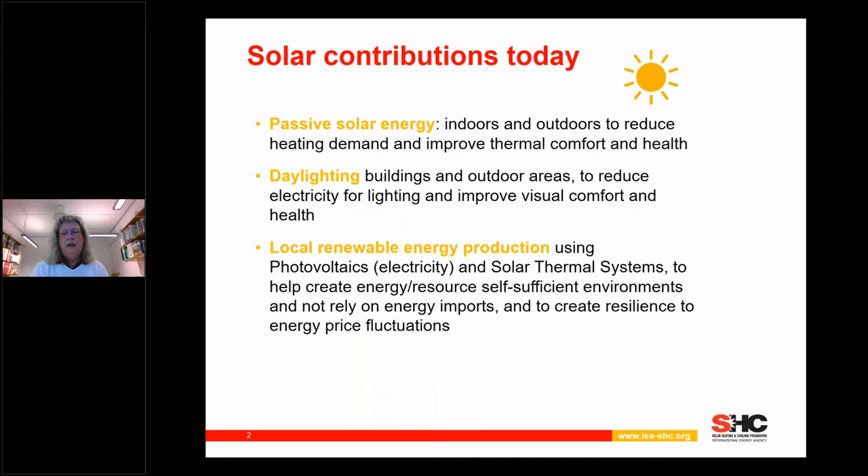And we can use it for local renewable energy production using PV and solar thermal systems. And in this way, we can create energy or resource self-sufficient environments. So we don't need to rely on energy imports. And in this way, we can create resilience to energy price fluctuations. And we can use it for local food production and green areas to improve air quality and reducing stormwater. So we can really use it for a lot of things. But I think that we need to use it more efficiently and more wisely in the future. I think we can improve this a lot.

So the opportunities for solar neighborhoods is that it is a means to achieve net zero energy districts and low carbon cities. And if we address both solar energy production and passive strategies when we plan neighborhoods, this enables us to identify synergies and to avoid conflicts between competing uses. So we shouldn't waste the possibilities to use available surfaces in neighborhoods. And we need to create long-term solar access.

This is very important. So if, for instance, you have a house where you put solar panels on the roof, you don't want your neighbor to erect a building on the other side of the street just 1 year after, destroying your solar gains and your investment. So you really need to have this secure solar access for a long time. And this is something we need to be better on when planning cities.

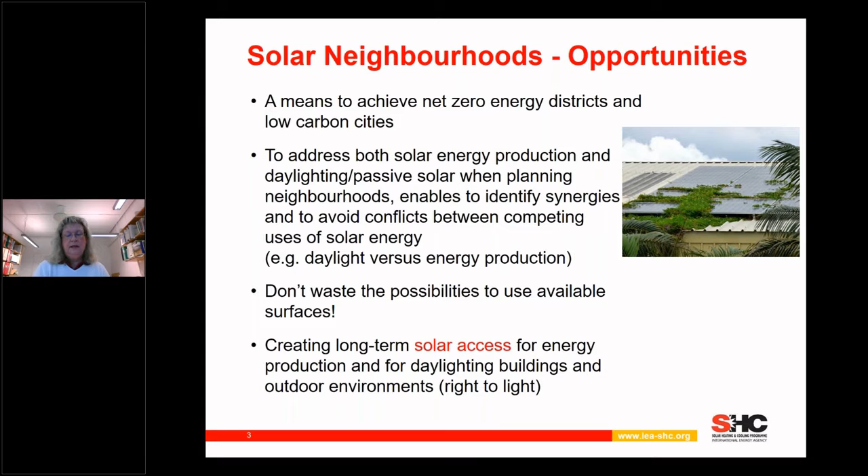Going to the project specifically, we started in 2019, and the project ends in 2023, the end of the year. So we are midways now, and the objective is to support key players to achieve solar neighborhoods that really facilitate this long-term solar access with good planning. And we work with and on new neighborhood development and to improve existing neighborhoods as well. And we deal with both active solar strategies and passive solar strategies.

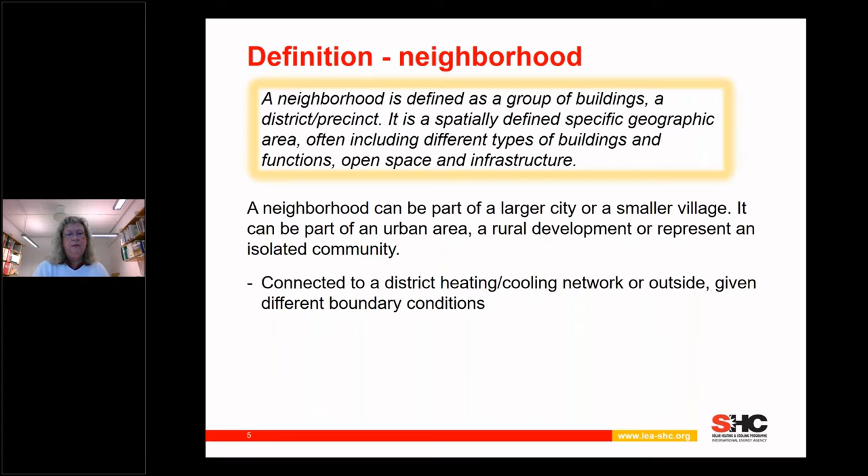And we define a neighborhood as a group of buildings within a specific geographic area, often including different types of buildings and functions, open space and infrastructure. And the neighborhood can be part of a large city or an isolated community or something in between. And of course it can be connected to a district heating or cooling network or outside such. And this gives different boundary conditions that we have to take into account when planning.

We organize ourselves in different subtasks with different leaderships. And we have 4 subtasks. A, on solar planning strategies and concepts with a Canadian leadership. B, on economic strategies and stakeholder engagement with the Italian leadership. Subtask C, on solar planning tools with a joint leadership between Sweden and France. And Subtask D, on case studies, which is jointly led by all the leaders, and we also have a coordinator helping us from Norway. And the case studies are really strongly connected to the other subtasks and topics where we work together and collaborate with municipalities and the key stakeholders.

And I am the general project leader. And the names here in red are the ones that you will meet today in the webinar. And the participating countries in our project are mainly some European countries, but also Australia, Canada, and China. So in total, we are 9 countries working on this.

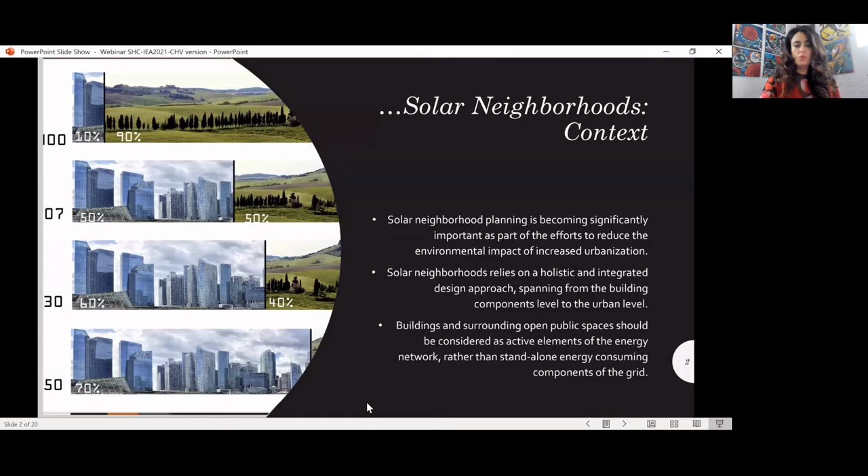Starting with a little bit of context, solar neighborhood planning is becoming significantly important as part of the efforts to reduce the environmental impact of increased urbanization, where by 2050 we are expecting 70% or more of the world population to be residing in urban areas. Solar neighborhood relies on a holistic and integrated design approach that spans from the building components and the building level to the urban level. Within this holistic approach, buildings and surrounding areas, including public spaces, landscape, streets, and street furniture, should be considered as active elements of the energy network rather than standalone energy-consuming components of the grid.

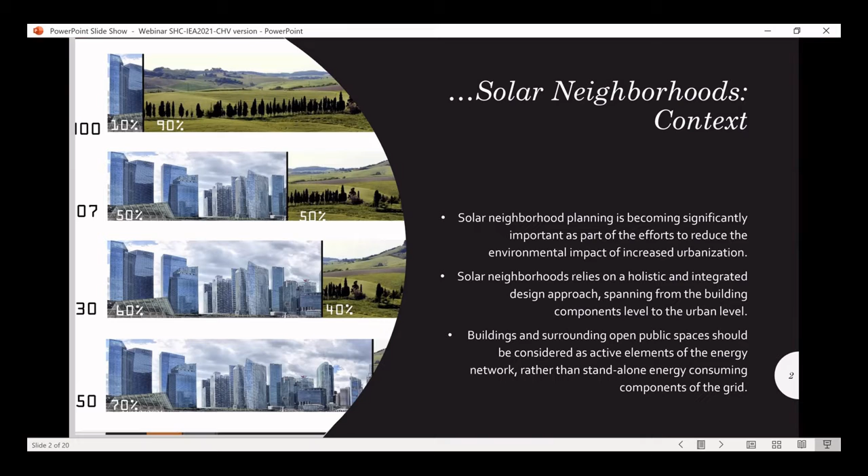So at the building level, solar building design relies on passive designs in buildings. In fact, passive design is often attached to solar building designs. Improving solar access together with various design principles such as thermal mass, high insulation, and airtight envelope are some of the basic principles of passive solar buildings. These principles can be implemented in all types of buildings, including residential buildings, offices, institutional buildings, and others.

Daylighting, passive heating of perimeter zones, passive and hybrid ventilation, coupling ventilation with solar chimneys, as we can see in some of these sketches, can significantly affect energy demand, reducing the energy consumption of buildings and their dependence on the local grid, which also can increase the resilience of buildings to climate shocks and climate risks.

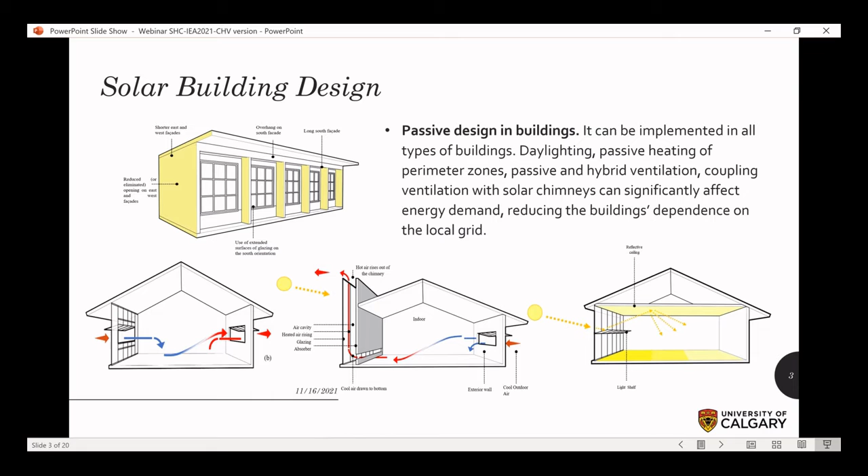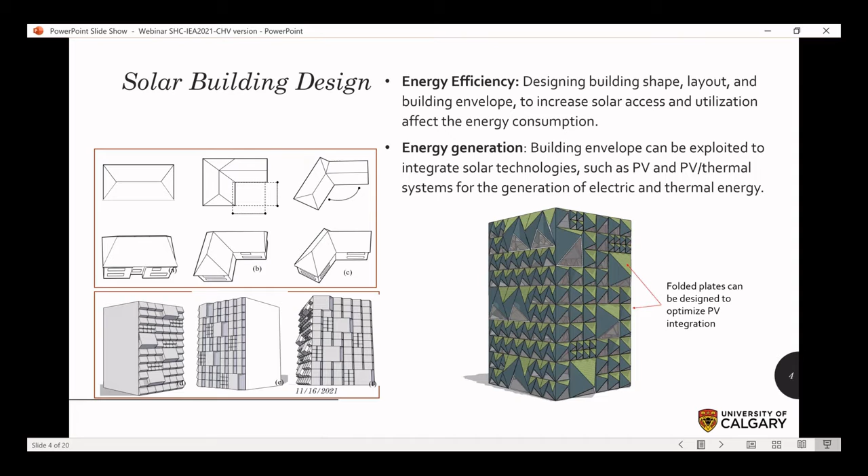Solar building design allows us to improve energy efficiency of buildings; designing building shape, layout, and building envelope to maximize solar access and utilization within the building affects the energy consumption of these buildings. It also allows better designed solar energy generation, since a well-designed building envelope can be exploited to integrate solar technologies such as photovoltaic systems, thermal collectors or hybrid photovoltaic thermal systems for the generation of electric and thermal energy.

Talking a little bit about building envelope design and the integration of technology. In fact, building envelope can be optimized to maximize the surface area and the exposure to solar radiation while preserving architectural and aesthetic flexibility. These are some examples of a theoretical study that was done by myself and my group at the Solar Lab at the University of Calgary, where we try to optimize the building envelope shape geometry through a different design of folded plates that allows maximizing solar radiation on these plates. And we were also integrating different types of photovoltaic systems in different colors.

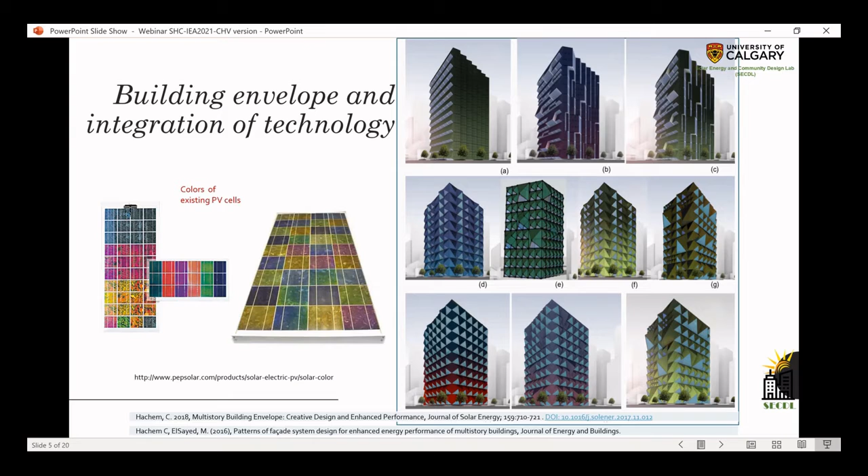At the level of neighborhood, many aspects affect an optimal solar planning. For example, the type of neighborhood and the building mix present can affect the building designs and as such available surfaces for solar technologies. Also, the ratio of commercial to residential buildings, for example, within a specific neighborhood type is important, especially when the goal is to achieve a net zero energy status.

An optimal ratio of commercial land area to overall built land area can be between 23% and 32%. This is according to a theoretical study that we conducted, where according to this ratio, we were able to integrate enough photovoltaic panels to allow achieving net zero energy within a mixed neighborhood.

Density is another important and critical factor in the design of solar communities. Studies associate, in fact, increased built density with sustainable development, but this should consider cumulative effects of various additional factors of a compact development. For example, the land use, the transit accessibility, job availability within walkable distance, walkability, and others.

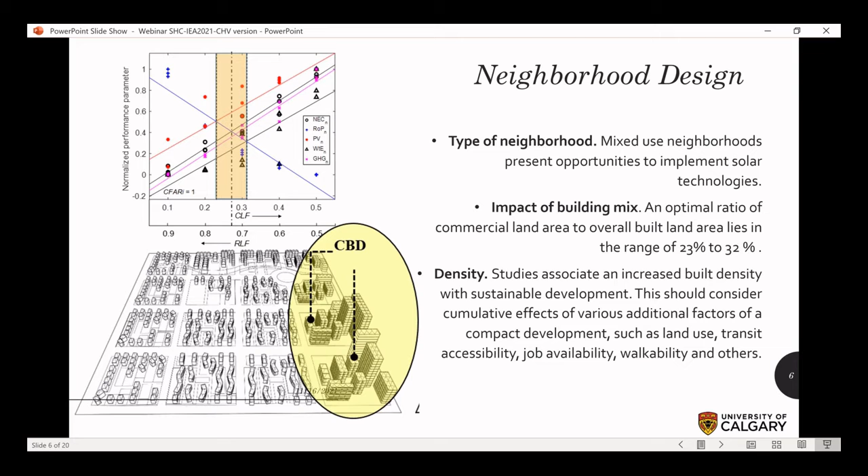There are other important elements in the design of a neighborhood that also impact their solar access and solar potential and their design as solar neighborhoods. This includes green and spatial areas. Landscape can offer, in fact, solutions for the integration of photovoltaic panels as well as solar thermal collectors and allows really to generate more energy that can be utilized in these neighborhoods.

Orientation of streets can affect the potential to capture and utilize passive solar energy as well as energy output of various solar technologies. And as such, they really should be considered from early design stage, and the buildings around them should be designed to get the best performance with the best orientation.

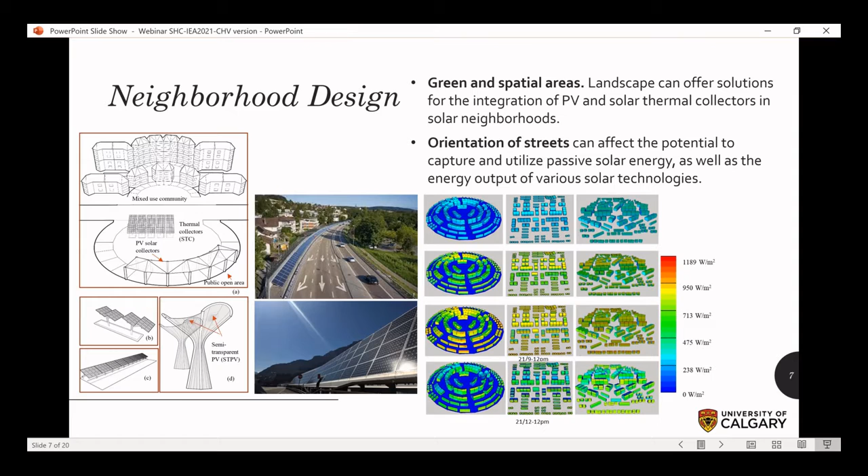Now, talking a little bit more in detail about the work that is currently ongoing in Subtask A, we developed specific designs of archetypes to study solar strategies. Archetypes in this task are considered as representative neighborhoods of existing or new patterns in different countries. This includes repetitive patterns of commonly applied design, such as streets, building types, shapes, density, etc.

And here is an example of commonly seen neighborhoods in North America, residential neighborhoods where we see a grid layout together with attached and detached houses. Other examples of archetypes can be representing uncommon or innovative examples. We have a few of these that were also presented and proposed by the experts in Subtask A, such as, for example, Sinfonia in Bolzano, the campus in Norway, and so on.

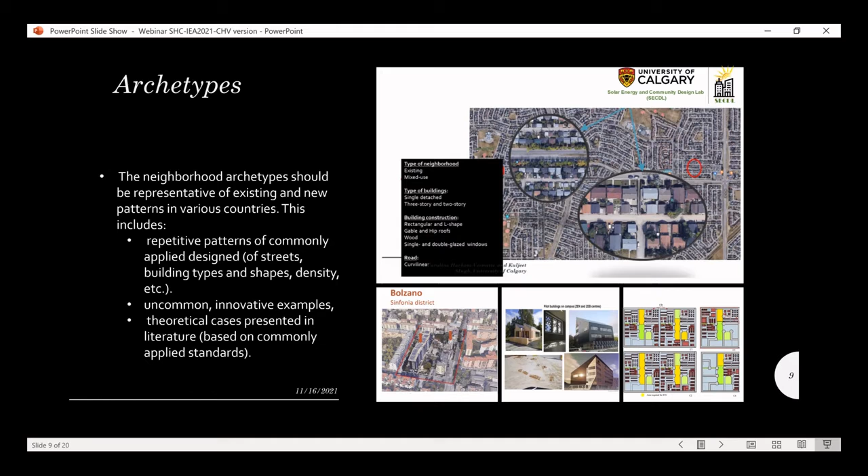Other archetypes can be theoretical cases presented in literature or especially developed to study different strategies. And here are also some examples of theoretical neighborhoods, and I will be talking a little bit about these and some examples of the results that we obtained in a couple of slides.

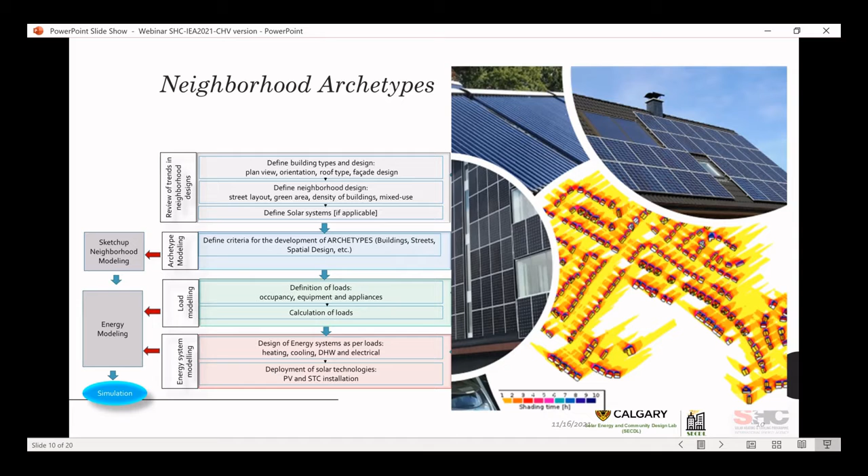A methodology is also developed to collect information about these archetypes, including building types, materials that are employed in buildings and building envelope, outdoor areas, and also materials employed in these outdoor areas, streets, etc. This information is collected in what we call a matrix. And this is an Excel form that can facilitate their input into various simulation tools, allowing us urban level simulations. Once the base neighborhood of each archetype is established, various solar strategies can then be analyzed.

Here now I'm presenting some of the theoretical examples that I just mentioned of neighborhoods, what we call the neighborhood units, and these are small neighborhoods designed according to various sustainable measures and range from residential dominated neighborhoods to higher density neighborhoods with commercial centers that include different types of trades and different types of buildings. The study aimed here at analyzing various renewable energy and the role of solar energy for thermal and electrical production.

I want to highlight also that the PV were accommodated in roofs and some portion of the facades when available, that means when we have higher rise buildings, and STC or solar thermal collectors are accommodated in parts of the roofs when PV area allows for this, and in landscape areas.

Results of this study show that PV electricity plays an important role in fulfilling a significant portion of the total electricity need of all the neighborhoods, up to 95%, in fact, for small scale or less dense neighborhoods. Some neighborhoods with high density and a high amount of commercial buildings need additional land area to accommodate PV panels that fulfill all the electrical load. And this can be quite significant, about 80% to 85% as compared to the total land of the neighborhood. Some of the high density neighborhoods as well require significant additional landscape area to accommodate the solar thermal collectors to fulfill the thermal requirement.

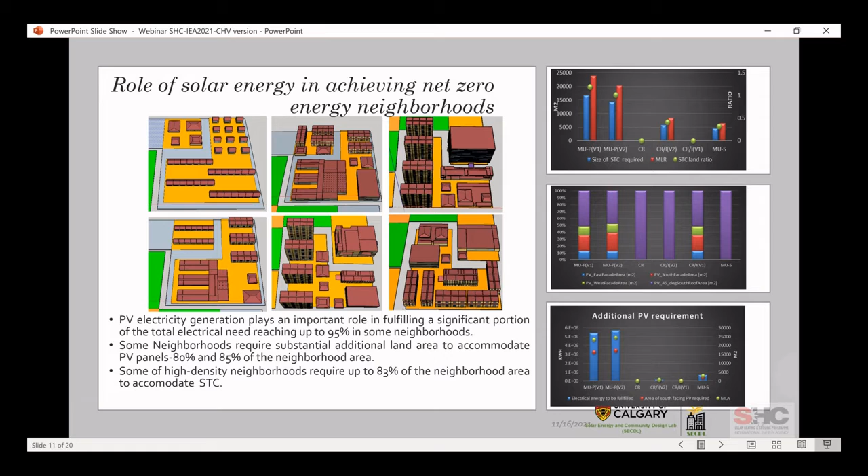In this example, some of the small neighborhood units that I showed before were combined together, according to their electrical energy performance, to allow achieving net zero electrical energy. And in this case also, PV plays a significant role in achieving net zero electricity status. In all these neighborhood combinations, the major portion of the PV electricity is supplied by roof-mounted PV systems.

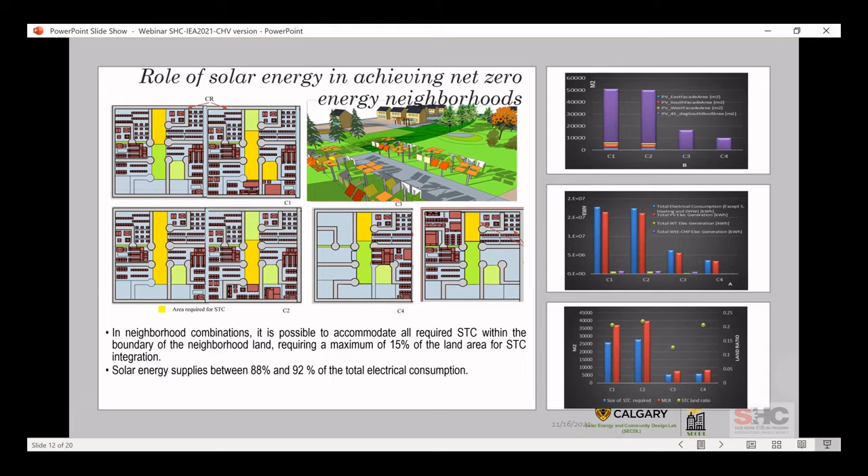Also, the study shows that the on-site sources can supply between 19% and 45% of the thermal requirement for the neighborhood combinations, but we still need additional solar thermal collectors, especially in high-density neighborhoods and larger neighborhoods. And this landscape area that's required to install these solar thermal collectors is significantly lower than the examples that I showed before for the smaller neighborhoods. The landscape area can be about 15% of the total land of the neighborhood, which can be, again, as mentioned, much lower than examples before, but also more feasible from an urban planning point of view.

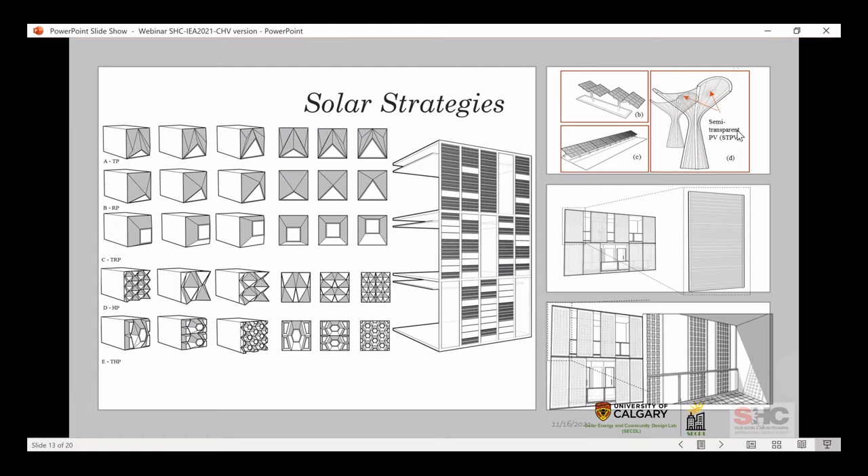Now, coming to the design of solar strategies and their analysis, different solar strategies will be analyzed using the archetypes, or the archetype concepts that I just talked about. This includes, but is not limited to, integrated solar technologies in roofs and facades, landscape integrated solar systems that can range from very traditional standalone elements to more interesting and more designed ones.

A workflow is developed to implement and analyze solar strategies, taking into account various factors such as spatial design of the neighborhood, the optimal surface areas to integrate technologies, neighborhood operation, and interaction with the local energy system, both electrical and thermal systems.

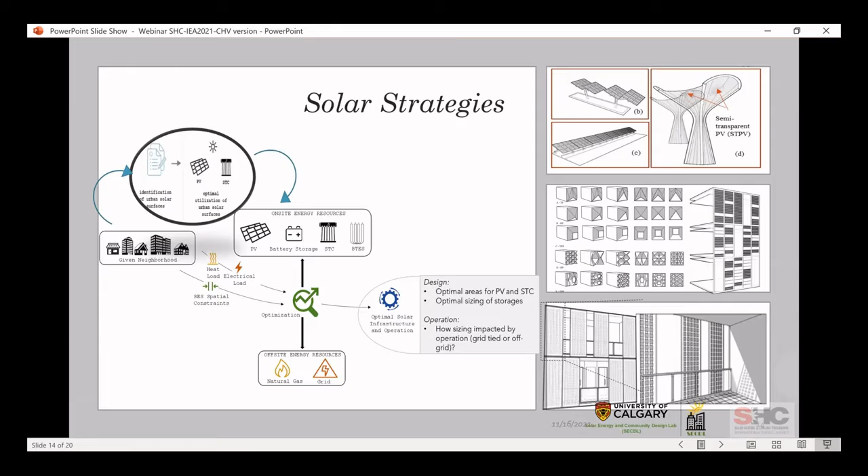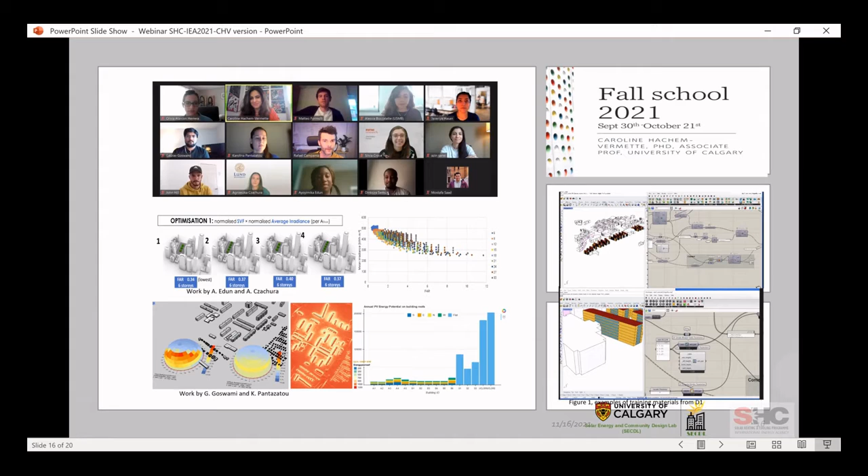Coming to the deliverables of Subtask A, there are a number of deliverables, but I want to highlight the most important. Two summer schools or fall schools are designed. One of them, a fall school, was already conducted in September, October of this year, and it was attended by about 14 PhD students from 6 countries that were trained in complex urban level simulations. Instructors from 9 different institutions were involved in the training. The next summer school will be conducted next year, hopefully in person in Calgary.

The final deliverable of Subtask A, which is still under development, will consist of a web-based database that presents various solar strategies and their potential application, with examples of neighborhoods under different climates. Solar technology can be selected according to the type of the neighborhood and the available archetypes that were studied, and available results will be shown to give an example of how to apply these solar strategies and what their impact is. This can offer flexibility of design for planners, architects, developers, and other key stakeholders by presenting examples of potential solar solutions for different settings.

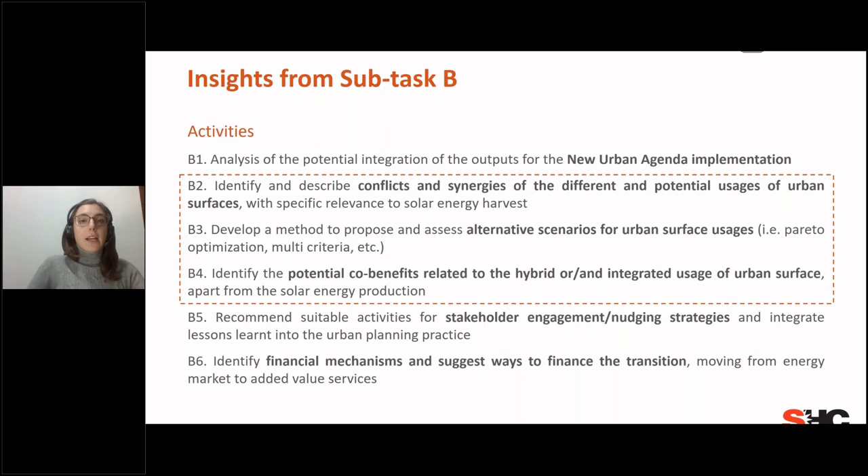We have a broad range of activities, and in particular today we will look at some results and some work in progress in these 3 core activities, which are related to the use of urban surfaces in solar neighborhoods. Why are we looking at surface uses in solar neighborhoods, and why are we actually trying to define the most suitable surface uses in such urban areas?

What we would like to achieve is having a broader focus. So we would like to consider all the surfaces available in our urban areas, which, as Thebault mentioned before, are a very relevant but limited resource. And we would like to aim to the use not only for solar energy production or the use of solar passive strategies, but also for the integration of a wider variety of solutions.

Why this? Because actually the surfaces of our solar neighborhoods and our urban areas have an unprecedented exploitation potential. We have seen from studies in literature that actually roofs allocate approximately 20 to 25% of the total urban surfaces, and the surface of the facades is almost double. So by using all these available surfaces, we might enhance not only the energy efficiency and the production of renewable energy in our solar neighborhood, but also the positive environmental impacts.

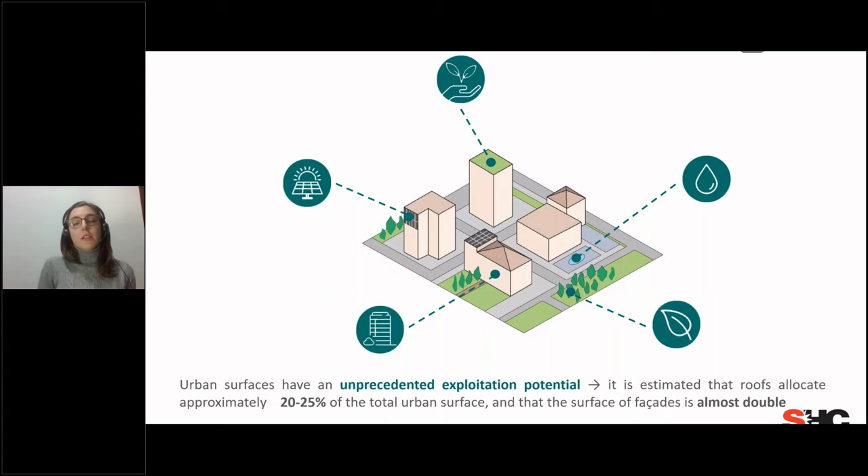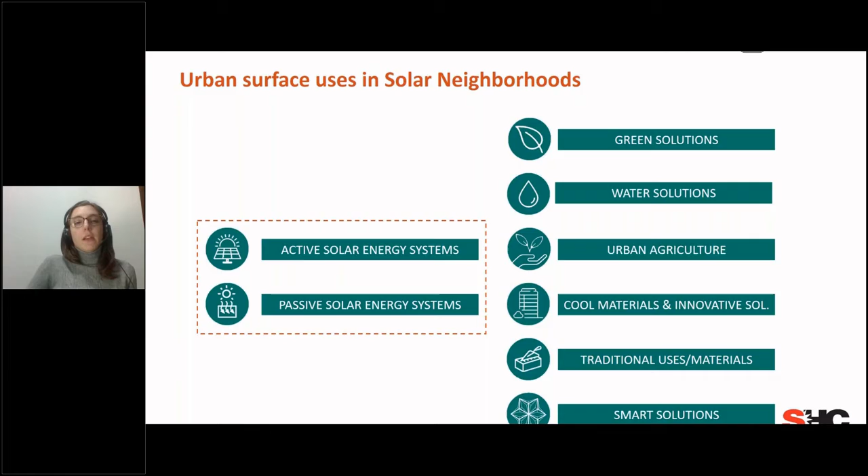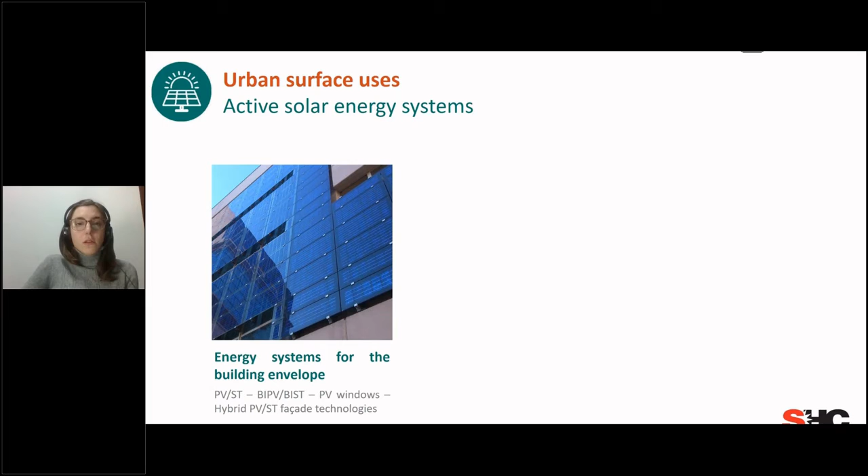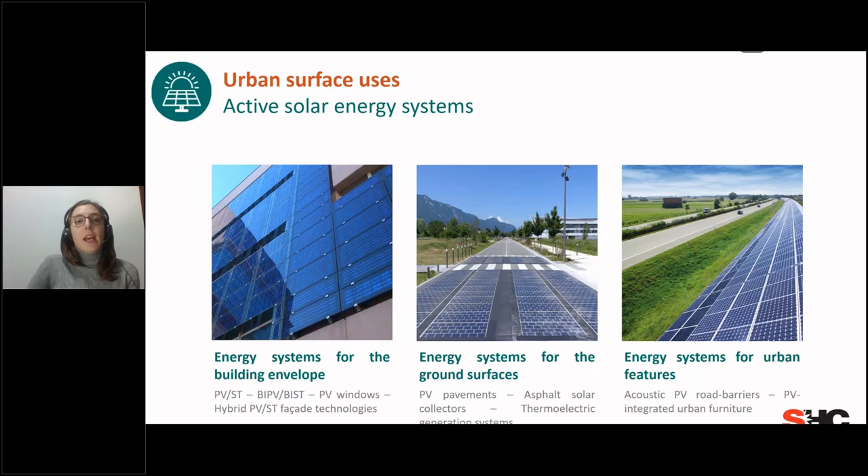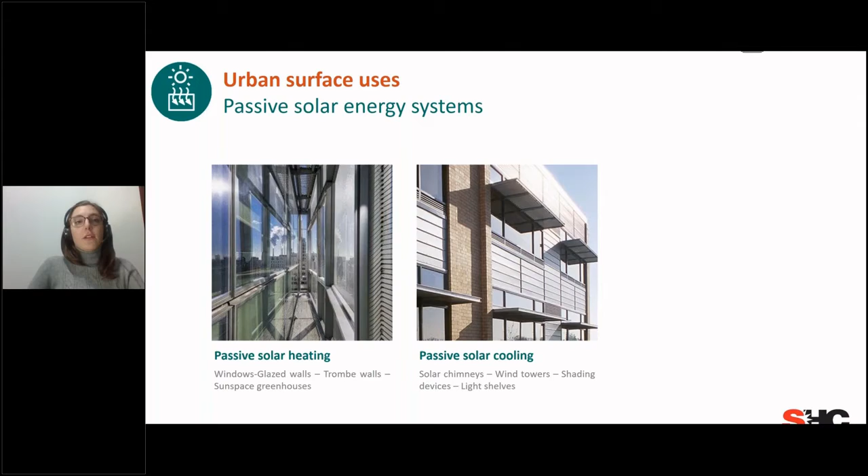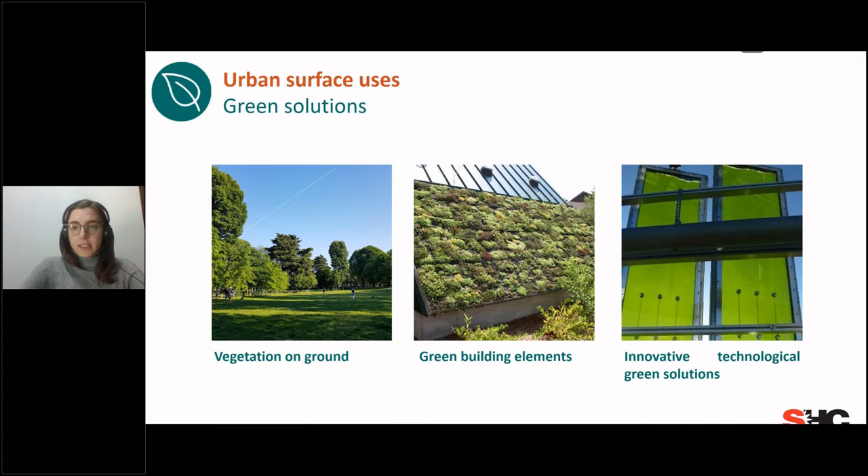And when we refer to passive solar energy systems, we focus on passive solar heating and passive solar cooling. But we also broaden our focus to other solutions. So for example, we have green solutions, which include not only vegetation on ground, but also green building elements, such as green roofs and green facades, and other innovative technological solutions, such as these microalgae panels for the production of energy. We also have water solutions which might be used in solar neighborhoods, from water bodies to evaporative techniques to reduce peaks of air temperature during summer, to water squares.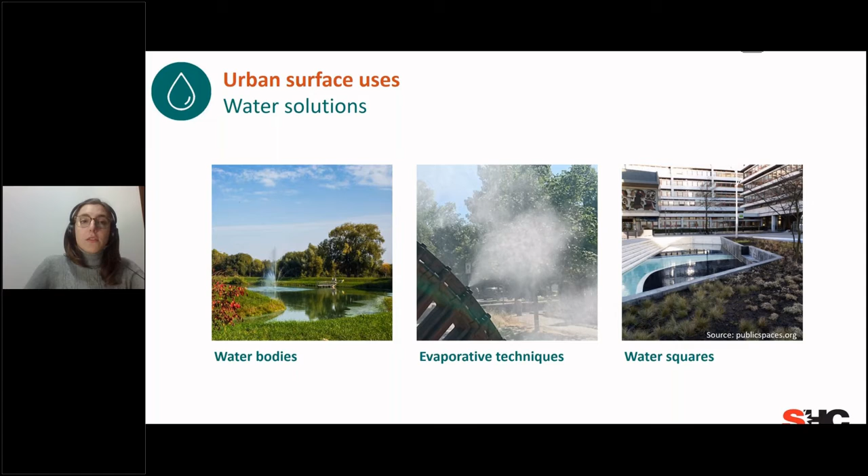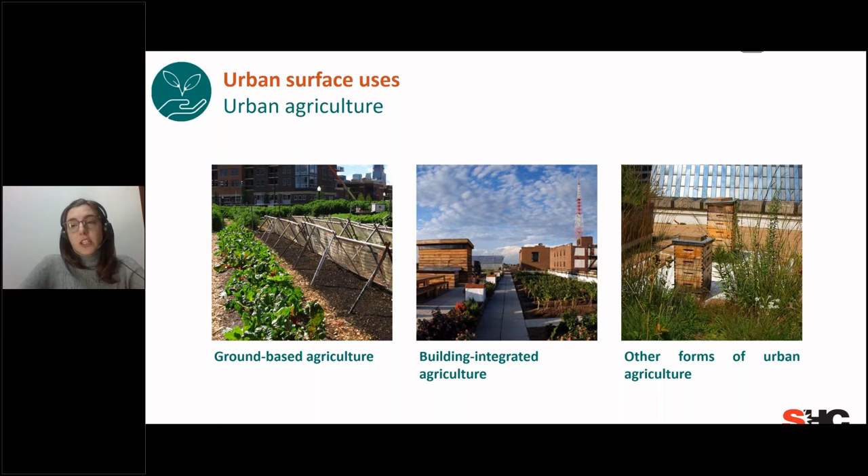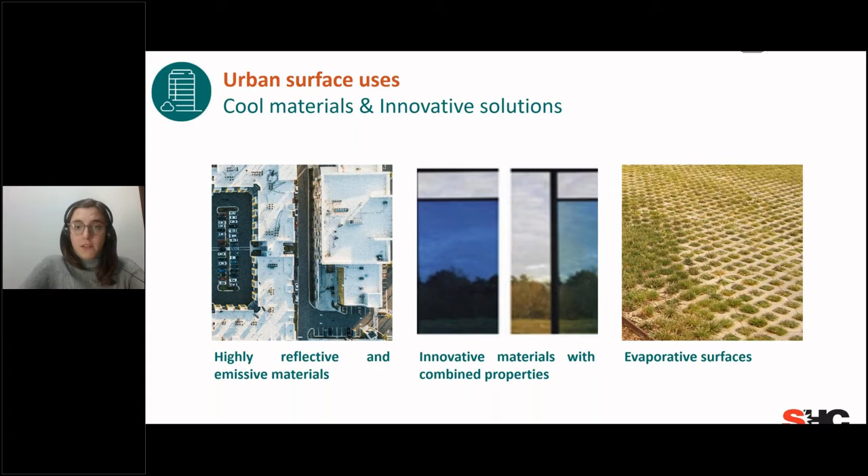We also included the potentialities to use urban agriculture, both ground-based, building integrated, or other forms of urban agriculture, such as beekeeping in our solar neighborhoods. And last but not least, we also consider cool materials, so highly reflective and emissive materials, which allow to keep the surfaces of the building envelope cooler, and which are also strongly related to the solar radiation, and also other innovative solutions. We also consider, obviously, the presence in solar neighborhoods of traditional uses and materials, which actually build our urban areas, but also the potentialities for smart solutions.

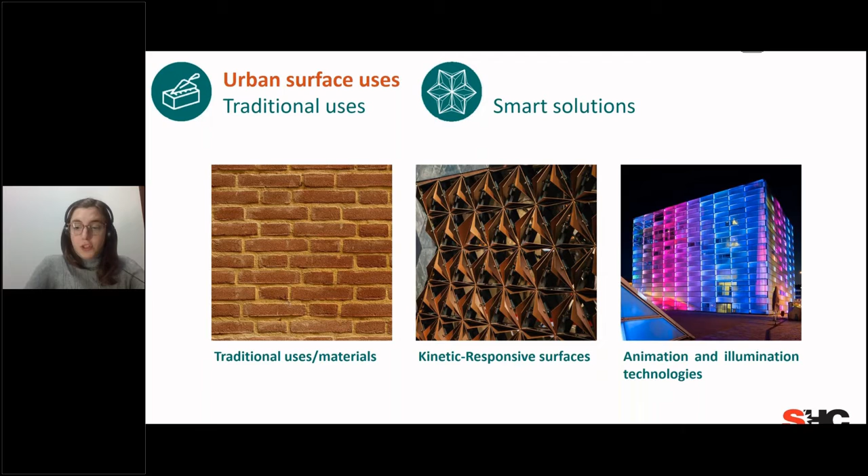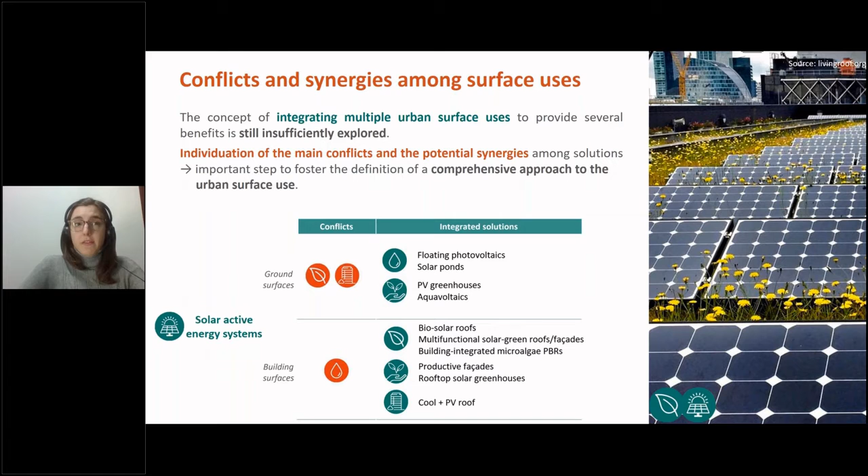What we then discussed in Subtask B are the conflicts and synergies which may arise among surface uses. So the question we posed ourselves has been, can we integrate the solar active and passive systems with other solutions in order to better exploit urban surfaces? What we did was to create a sort of matrix in which we analyzed conflicts and synergies among solar active energy systems and other solutions. One case is the one you can see in the picture on the right, a biosolar roof, which integrates PV systems with the green roof, which also acts as a cooling element for the panels and helps in enhancing the energy efficiency. But there are also other solutions such as multifunctional solar green facades and cool roof integrated PV.

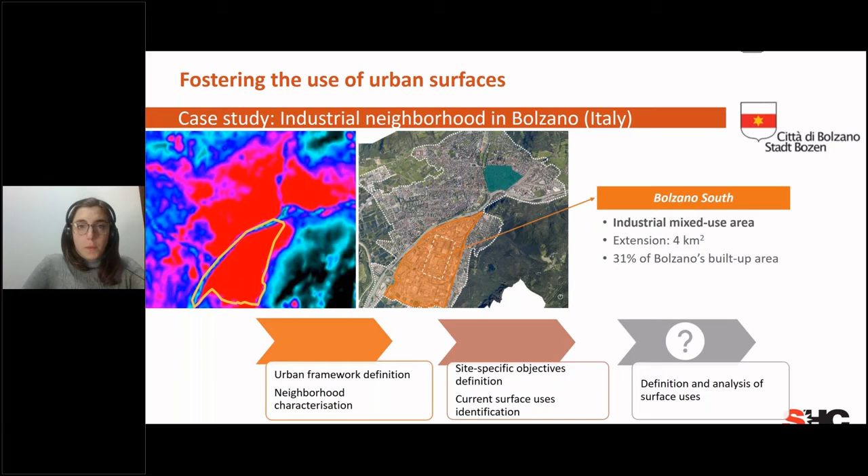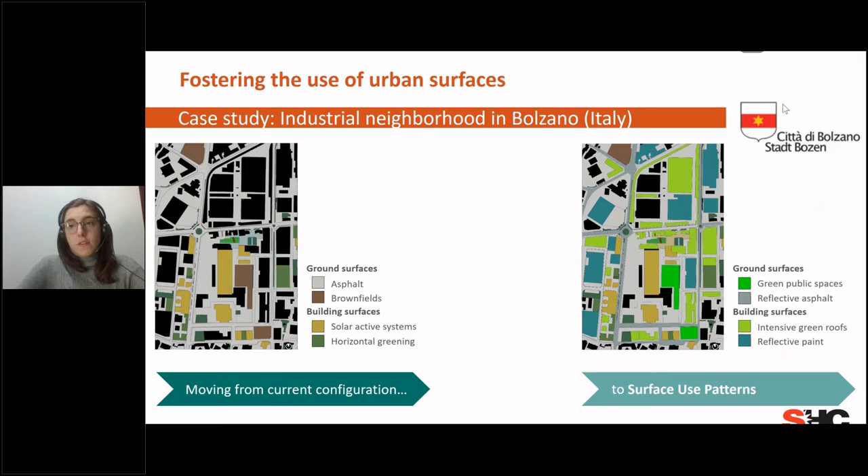So just an example of what we would like to do in fostering the use of urban surfaces. This is the case study of an industrial neighborhood in Bolzano we are analyzing in the context of Task 63. And this is relevant because it covers a large portion of the city of Bolzano. What we would like to propose through our activities in the task is a methodology for moving from the current configuration of the district, which integrates the common surface materials and some solar active systems, to a surface use pattern, a configuration of the district which integrates also more innovative solutions, in which the use of solar active systems is enhanced and there are also other solutions such as the green solutions. How might this be done? Through several methods, integrating on-site monitoring, the use of environmental tools, and also multi-criteria approaches.

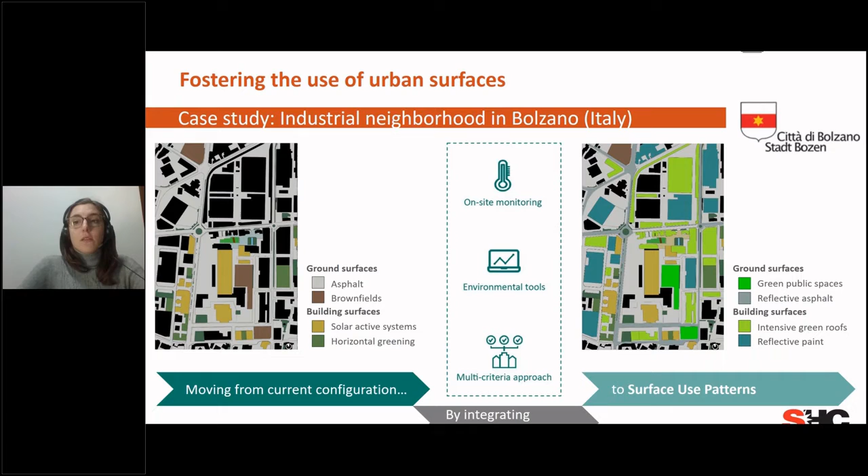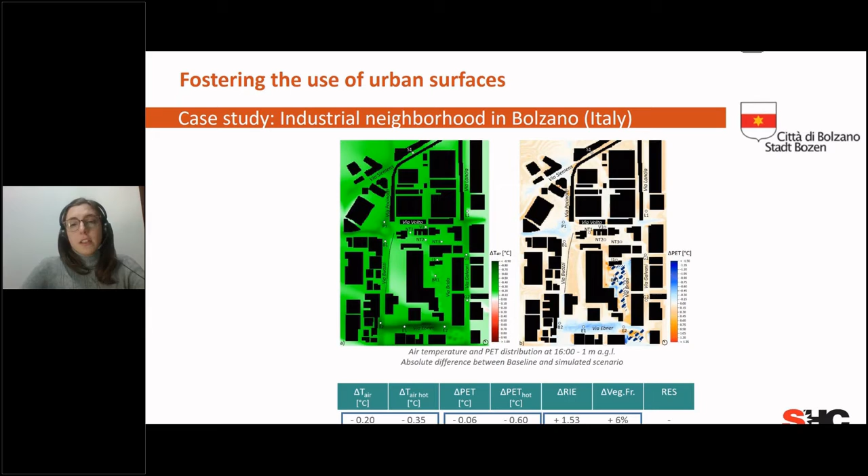And what is then done, of course, the results are analyzed. Here you see some example of analysis with relation to some environmental parameters, so air temperature and human thermal comfort, but also the analysis of the solar potential and so on and so forth will be carried out.

So what's coming next in relation to these activities in Subtask B and in Task 63? First of all, by the end of February, we will release our first deliverable that will deliver a report on surface uses in neighborhoods, focus on how to define the most suitable uses, but also avoid conflicts and create synergies. So if you're interested in the topic, keep an eye open on our website, and you will soon find our first deliverable.

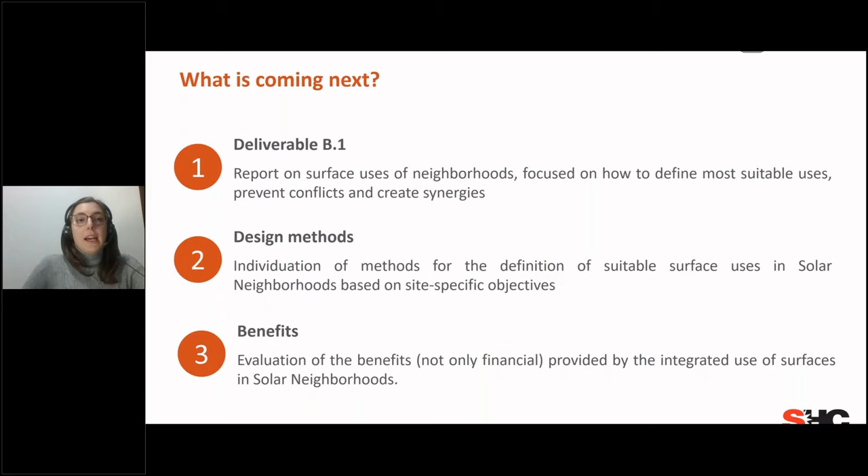But we will also focus, as in the example I showed you, on the individuation of methods for the definition of the suitable urban surface uses in solar neighborhoods, based obviously on site-specific objectives. And we will also focus on the benefits, not only the financial ones, but also the environmental and the social ones, which the integrated use of urban surfaces might provide in solar neighborhoods. And in relation to this, we are actually working also on the identification of the potential co-benefits related to the use of urban surfaces in solar neighborhoods.

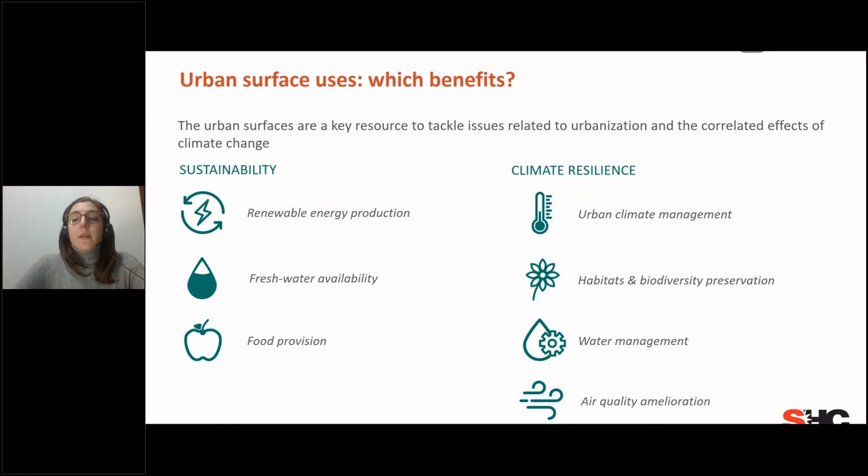What we highlighted in our discussion and work in the task in these 2 years is that actually urban surfaces are a key resource to tackle several issues related to urbanization and climate change. So they offer benefits not only related to the production of renewable energy, but also to other sustainability benefits, for example, the availability of fresh water and the food provision, but also they offer benefits in fostering climate resilience. So for example, they allow to improve the management of urban climate, to preserve habitats and biodiversity. They contribute to the management of stormwater and also to the amelioration of air quality.

What has been the first step in understanding the relevance of these potential benefits in solar neighborhoods? It has been a survey which aimed to identify priorities in the design and implementation of solar neighborhoods. We actually asked our participants to evaluate 55 urban challenges from 0, which means not at all relevant, to 10, which means extremely relevant. We've done and we are doing this in 2 phases. In 2020, we opened this survey just to the Task 63 experts and we got 25 responses. While this year in 2021, we are diffusing this survey also among external experts and practitioners. And this activity is still ongoing, so you are really welcome to contribute to this.

Why we decided to open the survey to external stakeholders, it has been because from the analysis of the responses we've got from the Task 63 experts, we noticed that actually our point of view is quite limited. Many of us are engineers or architects, still have very focused experience on design, urban planning, and also solar active and passive systems. And so some of the responses we've got on the relevance of these urban challenges might be influenced by our background. I will just bring you some of the examples of the results from the survey carried out in 2020 among Task 63 experts.

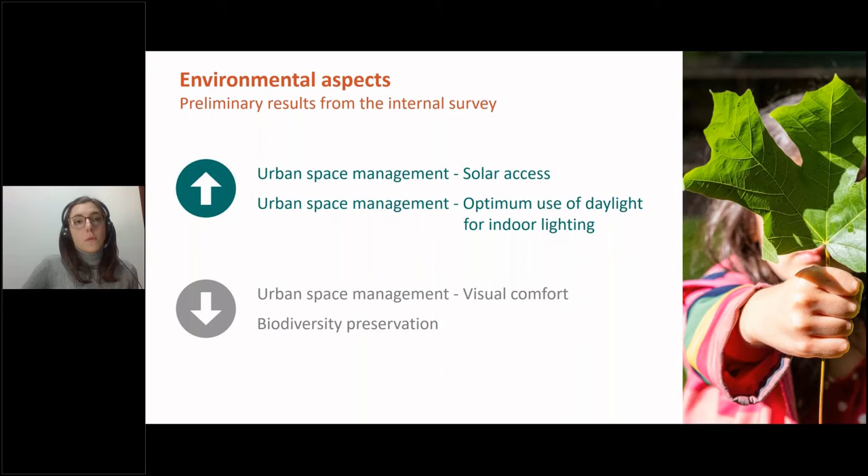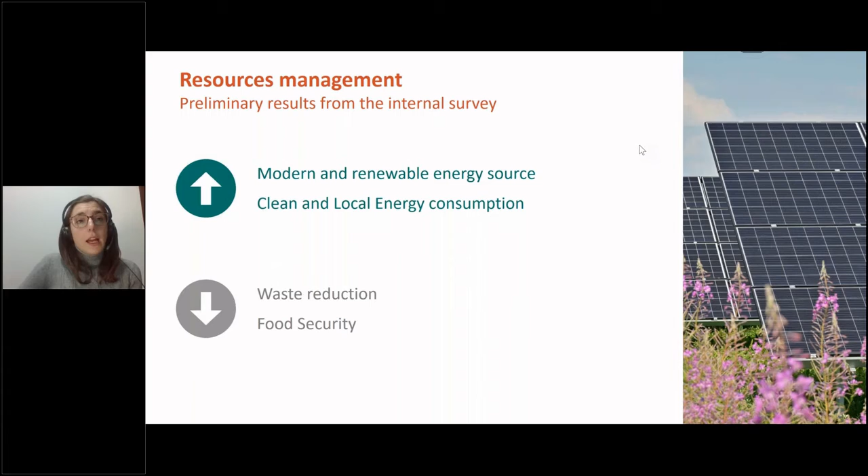Another aspect we analyzed, and we are analyzing, is also resource management. In this case, modern and renewable energy and the provision of clean and local energy consumption were identified as the most relevant, while waste reduction and food security were less considered. If we move to social aspects, also in this case, we got some surprises. The presence of public spaces and an increased quality of life for health and well-being were highly considered by the experts. But, for example, acoustic or also gender equality received a very low score.

We also analyzed economic aspects. Here, peer-to-peer trading of energy and prosumer-based business models are perceived as very relevant by the task experts, while real estate value increase and the increment of energy prices less. So, as I mentioned before, the survey is open to everyone and it will take approximately 10 minutes to complete it. The answers will be anonymous and then the results will be reported in an aggregate way.

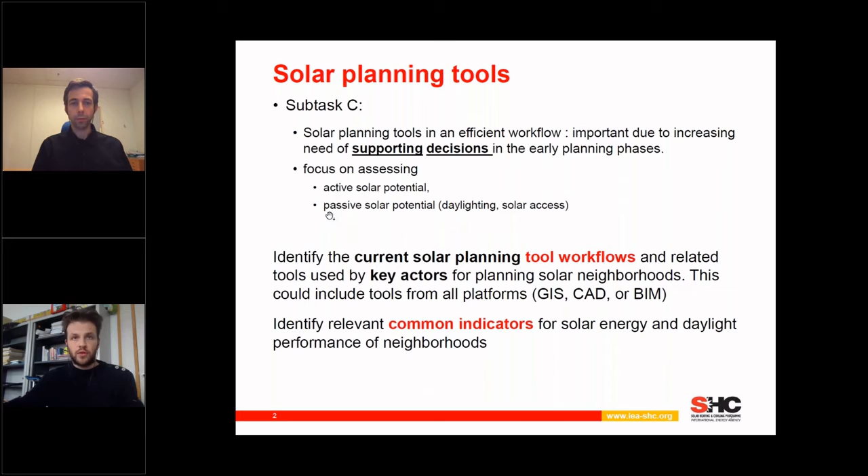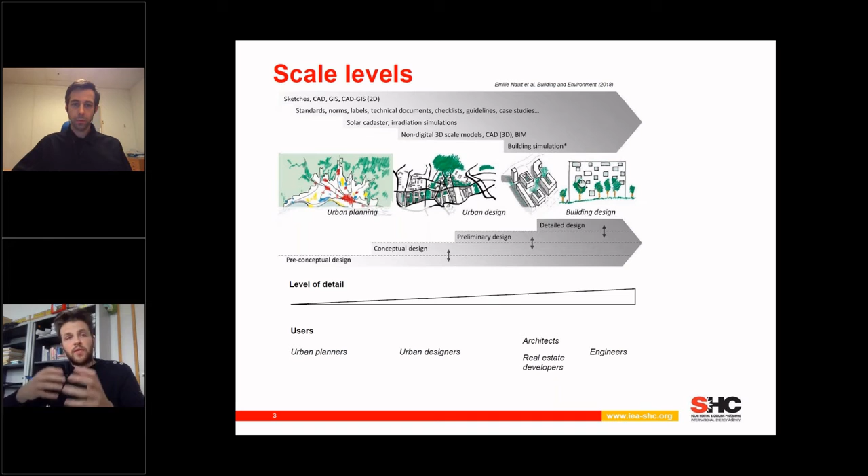Just an illustration of the complexity could be seen here from an illustration of Emilie Nault. Here you can see that in the planning of solar energy neighborhood, you have many different factors that appear, and one of them is the scale. Because if you take the urban scale or the building scale, you have many different things to address. The data is not the same, the quality of the data is not the same, and you have different layers of tools that you can use, and you also have different types of actors and users at each step.

So in what follows, we will show you some achievements we have been doing in the Subtask C. One about gathering smart and relevant performance indicators, one about trying to gather workflow stories to identify current tools and best practice, and some comparisons of current tools.

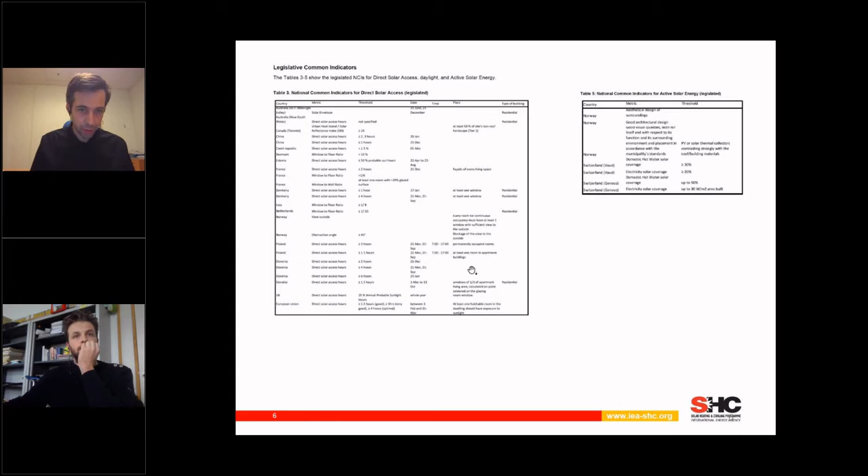Yes, thank you, Martin. So one of the first things that we did within the task was to gather something that we called national common indicators. So they are basically key performance indicators that are very specific to the participating countries, and we gathered those common indicators that were both related to the active solar energy potential, meaning, for instance, the solar thermal potential or PV potential, but also on the passive solar energy potential.

And here you see one of the tables that we found from looking at legislation in the participating countries. For instance, when it comes to direct solar access. So in some countries, the legislation states that, for instance, a bedroom should have at least 2 hours of direct solar access at a certain date. While other countries might say that, well, at another date, it's maybe 1 hour or 3 hours. And there are pretty big discrepancies between the countries, even though they are at the same kind of latitude.

When it comes to the active solar energy legislation, there are not many countries that actually prescribe, when you are constructing new buildings, that you have to install an active solar energy system, be it PV panels or solar thermal panels. So it's kind of interesting to see the difference between the different countries. Can you do next, Marta?

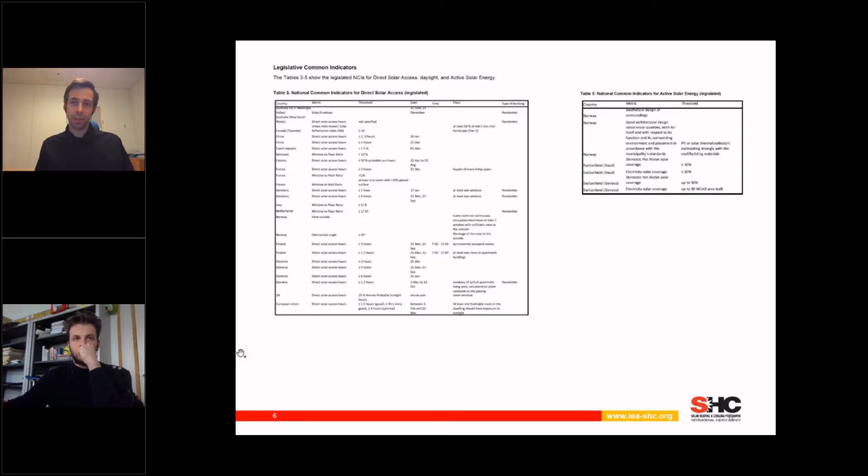Yeah, so then we looked at what are the implications of those different common indicators. That's why we took 3 national common indicators to kind of showcase the implications of those common indicators.

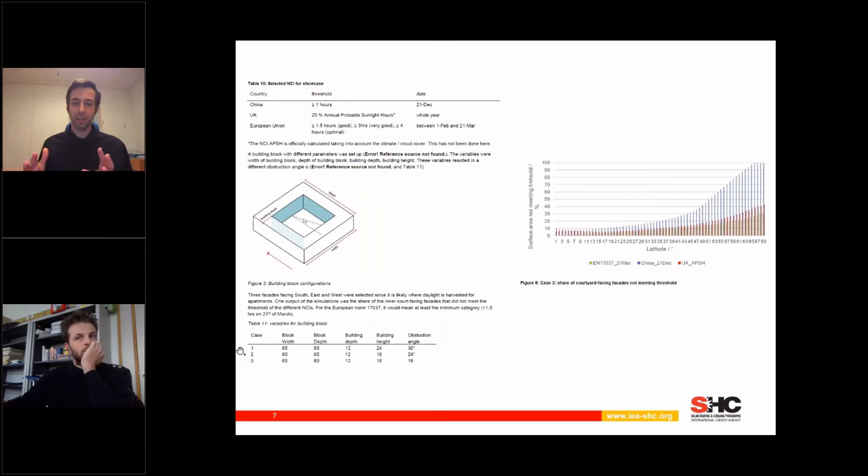So we took a rather random courtyard building, and then we simulated this courtyard building at different latitudes. So meaning we looked at the different solar conditions at the different latitudes, and then we applied the different national common indicators to this. And then you can see on the right hand side, for instance, this graph here, that those is the share of the courtyard facing facades that are not meeting the thresholds of the national common indicators.

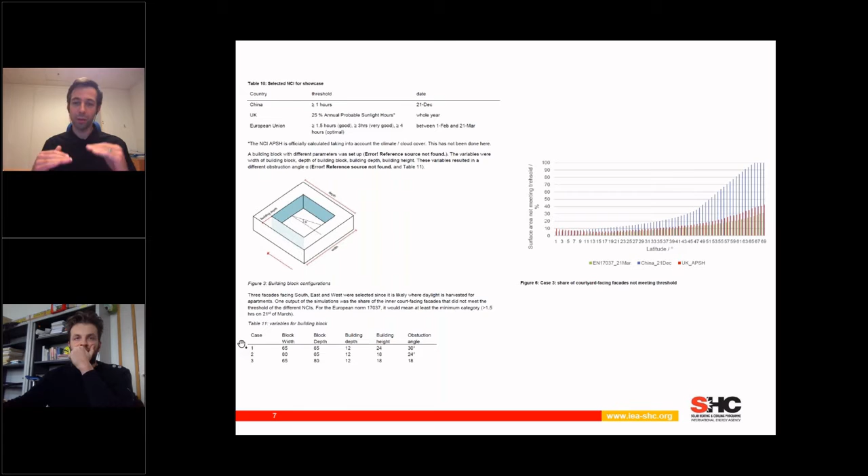So of course, the higher on the latitude, the harder it is to reach those thresholds. And this you can see pretty well, I would say, in this graph. And again, it kind of demonstrates the fact that even countries at the same latitude might have a very different approach to what solar access is and what level is considered to be a good solar access.

Next, please, Marta. Then, parallel, I would say, to gathering the national common indicators, we also were interested in how do key actors in the design process of solar neighborhoods use tools, and that's why we have something that we call the workflow stories, where we actually gathered this.

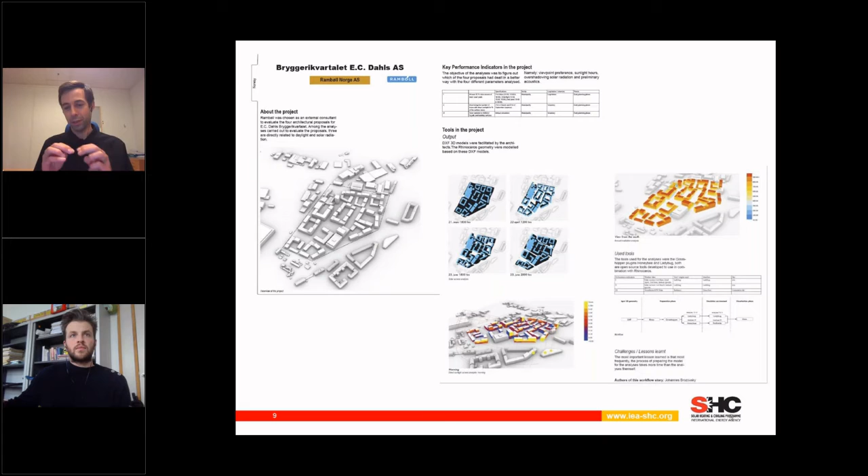But then what we were interested in also was not only the indicators, the key performance indicators, but also which tools they have used to assess those key performance indicators. So for every one of these workflow stories, we asked the people that wrote these workflow stories to provide input for the tools, but also output, and also describing the workflow.

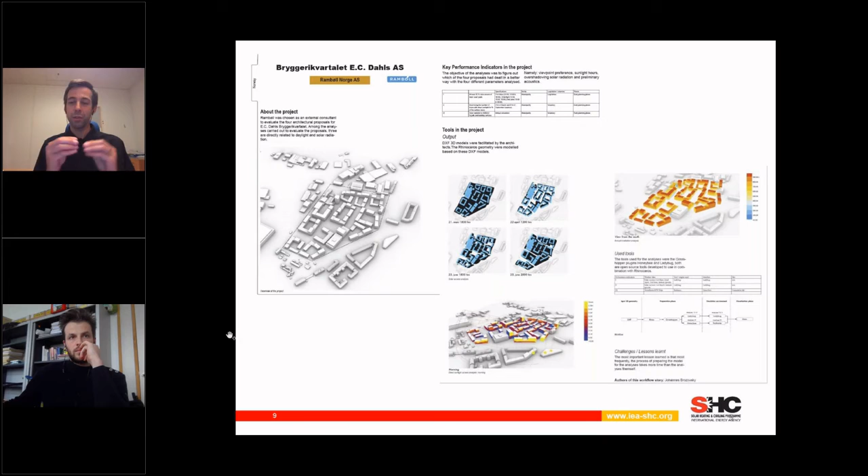Since urban planning is a rather difficult process, it might be that you have, as Martin already said, different data available with different quality. So it might be that you have to use different tools in order to kind of give answer to the performance of a neighborhood. Can you go next slide, please?

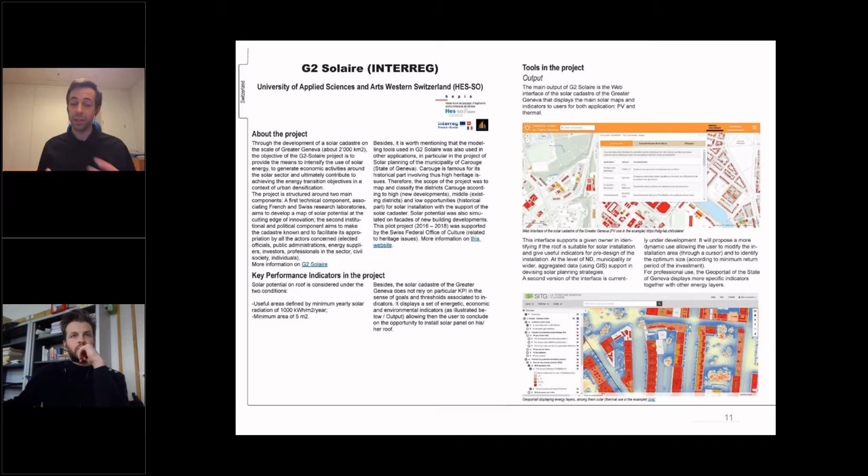Well, here's another example of an advanced solar map where one of the task experts developed this solar map where you can get more information about the conditions for your real estate property if you're interested in installing, for instance, a PV system or a solar thermal system. Yes, next, please.

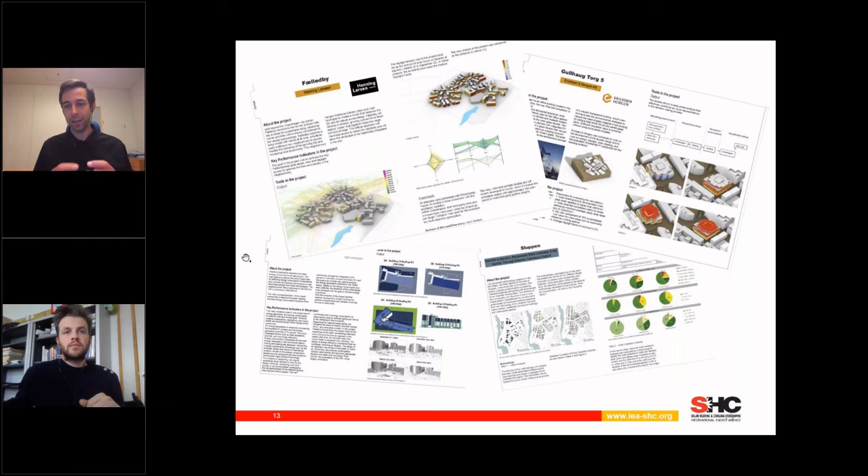And here also, it's not very simple to do all these kinds of simulations, and you have to kind of find a way. Sometimes you even have to develop your own modules in order to get the result. So here's just an overview of some of the other workflow stories that we gathered from different companies or from academics where people have used different tools to analyze the potential of solar neighborhoods. Yes, Martin.

Okay, so I will finish with one last thing that we carried out within the task. So as Jouri just mentioned, there are a lot of different tools, and one thing we thought was to try to use a maximum of these tools doing the same task, what we call here a benchmark study. So for this study, we set up some rules. The rules are quite simple.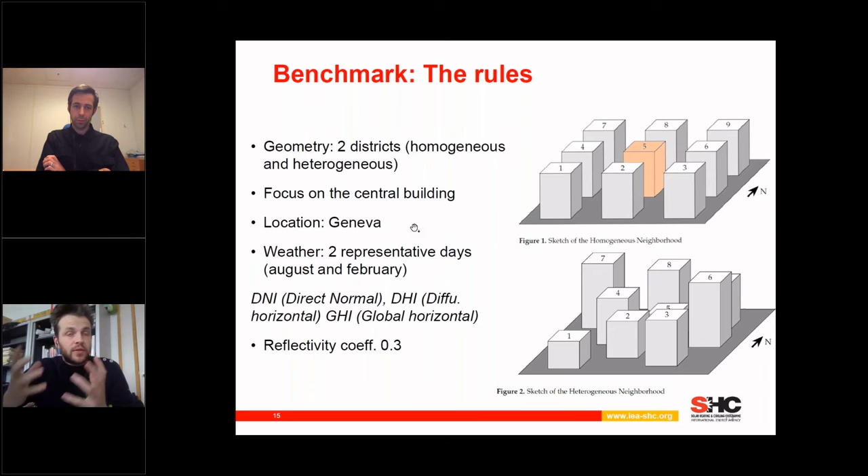We use two different districts, one which is like a grid district, and the other one which is more random. It's in Geneva, and we provided it to experts. We provided them with the geometry, the location, as well as the weather data. So basically, everyone is supposed to have the same simulation conditions, initial conditions.

Regarding the tools that we used, here you have a list on the left-hand side of the tools that we have been benchmarking. One thing that may be interesting here is that these tools were not, at the origin, designed for the same purpose. Some of them were more designed to perform daylighting studies, whereas other ones were more about energy in cities, or even there is the solar map of Geneva that we just talked about. And there is also one model which is used for weather prediction in physics.

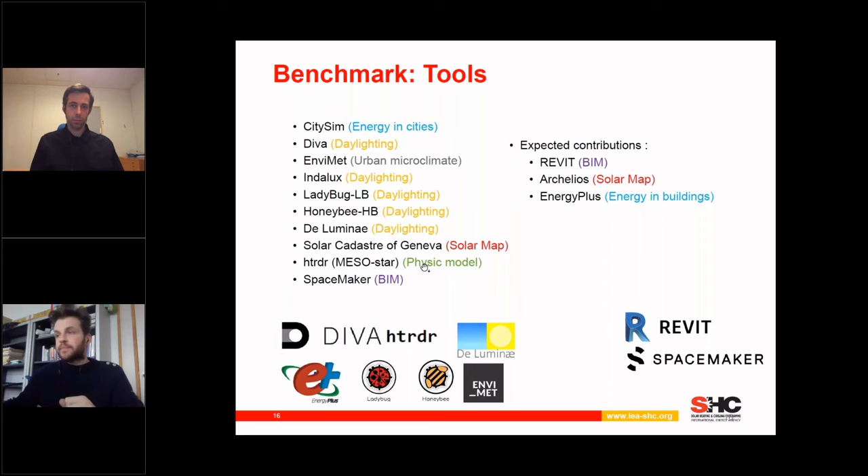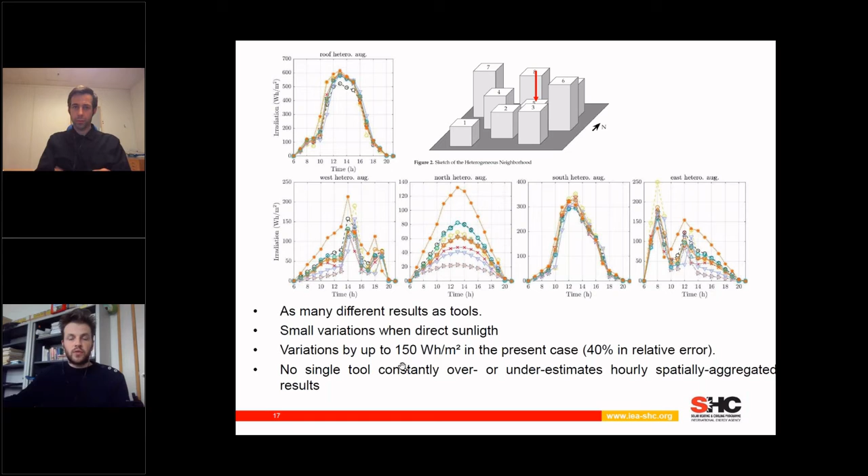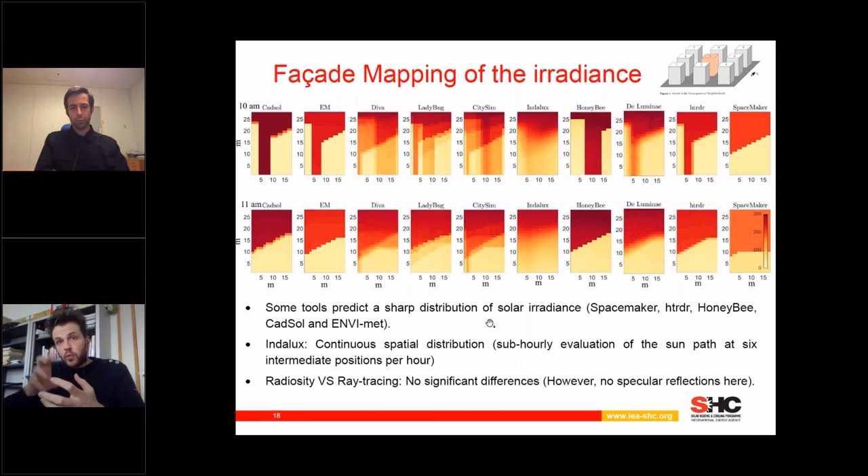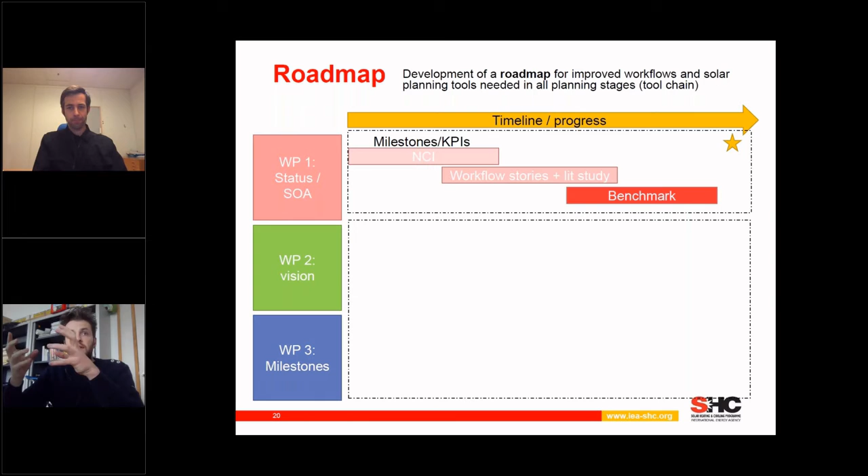So to finish, here we are at the midterm of the task. What we plan to do is a roadmap for the improvement of the workflows and the solar planning tools. Here we showed you some of the results we got, and all these first results and studies are here to set a state of the art, a status. Where are we now? What are the tools? What are the KPIs? How do different tools perform compared to each other? Then in the second part of the task, we want to have a vision of what we should do and set different milestones in order to improve this workflow in the context of the solar neighborhood.